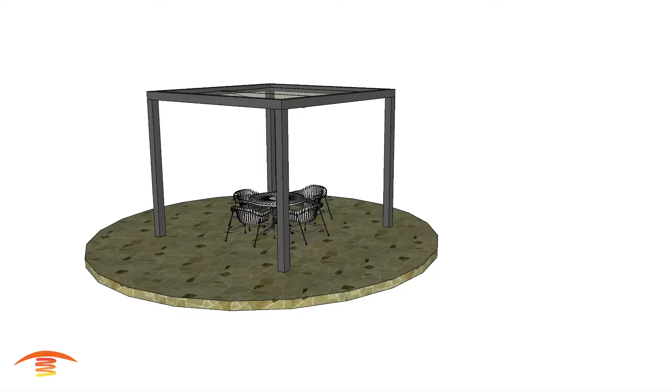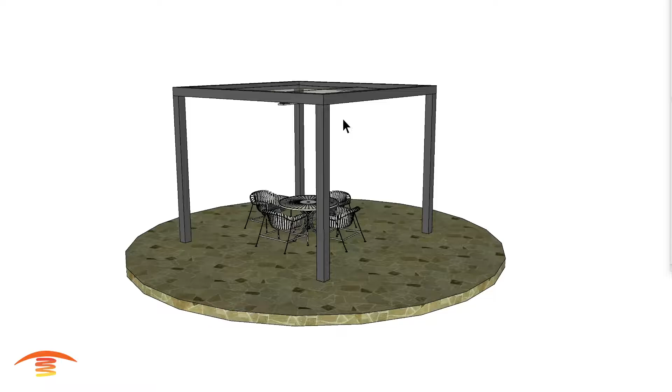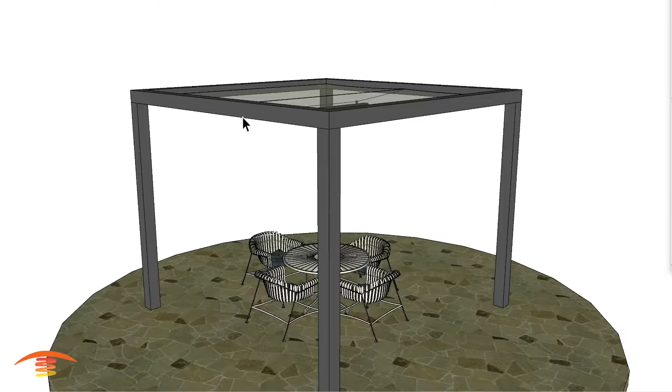Now let's get heating. All right, so we have a listener here that was inquiring about the best possible model for an application like this. This is called a Lynx Pergola, I believe. And if I understand it correctly, it's basically a frame with a canopy top on top here for shading. And I just have this made out of 6x6 framing. I think it's steel framing, so it's all 6x6 steel framing around the edges here.

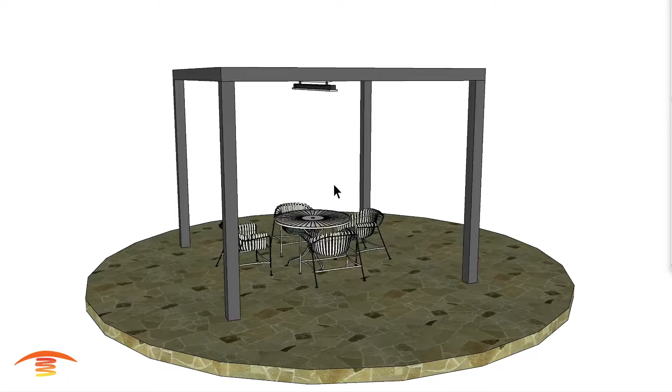Question was really, should I use a 3000 watt unit so I can use the INF, or should I use a 4000 watt unit without the INF? That's the main question here. This particular listener lives up in Northern California. I believe in Northern California I would want something a little bit warmer than a 3000 watt unit, but it really depends on the application height itself. So let's just go ahead and look at the overall dimensions I put on here, 9 feet by 12 by 12.

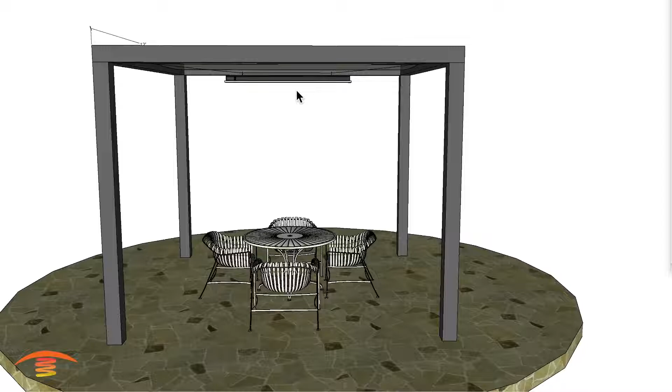So at this elevation, 9-foot elevation, I would probably recommend a 4000 watt unit. I wouldn't go to a 3000 watt unit unless the bottom edge of the heater will be between 7 foot off the ground to 6.5 foot off the ground. That would be my recommendation for a 3000 watt unit. So if your pergola is going to be a little bit lower, that would be a 3000 watt unit.

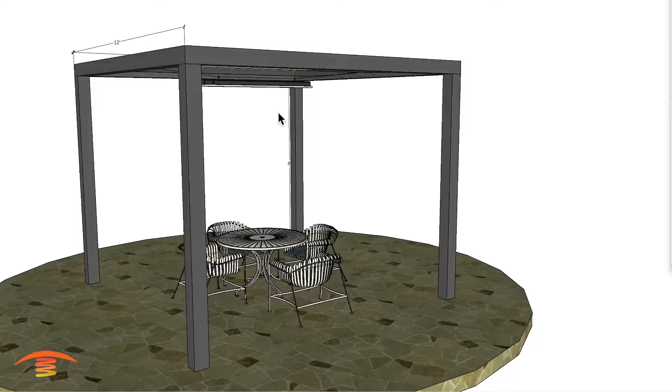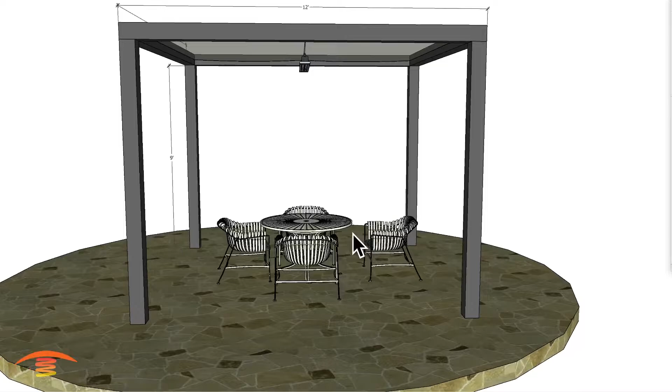You could use that. Now, personally, if I was in Northern California, I would probably want a 4000 watt unit no matter what, because it just puts out more heat, and you're not going to use this heater when it's kind of warm. If you really wanted to, you could just basically move away from the heater. So if you're the hot person of the four seating that I have here, just move your chair out a little bit further and you're not going to be in the ray as much.

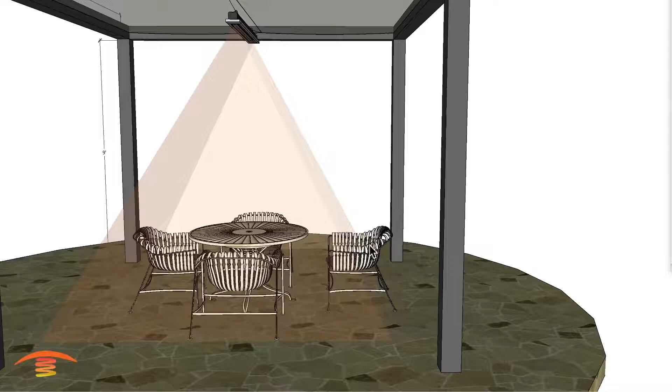So just speaking of that, here's your ray, and you can see here everyone else is covered fairly well. But you could just move your chair out and you're no longer in the ideal amount of ray. The ray doesn't bend and stretch. It does physically penetrate the chair, but you're not going to be in the hottest or warmest portion of it. It's not really that hot, I wouldn't think.

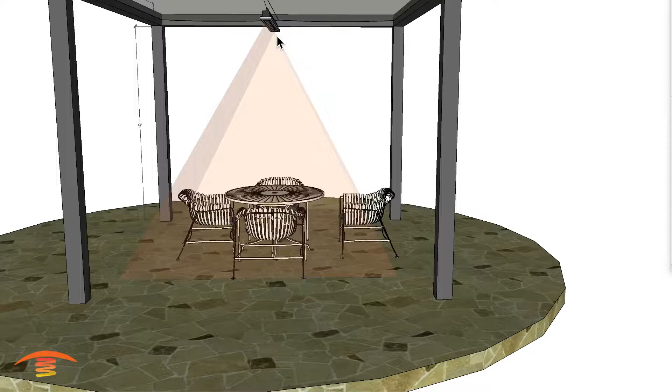Even at 9 foot off the ground, I'd probably want something more in the, personally, 34,000 BTUs or 25,000 BTUs. This is more in the nature of, I think, 12,000 BTUs, something of that nature. In any case, some other things that you want to be aware of.

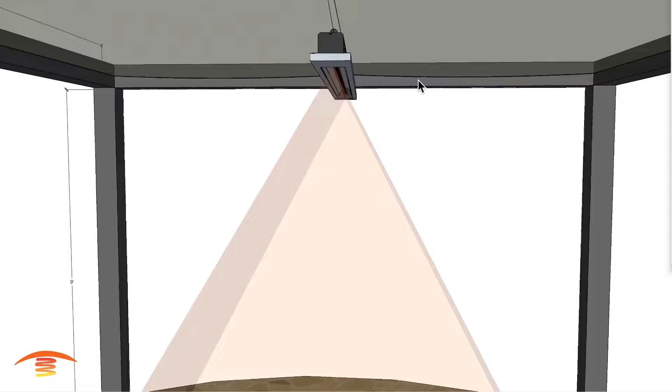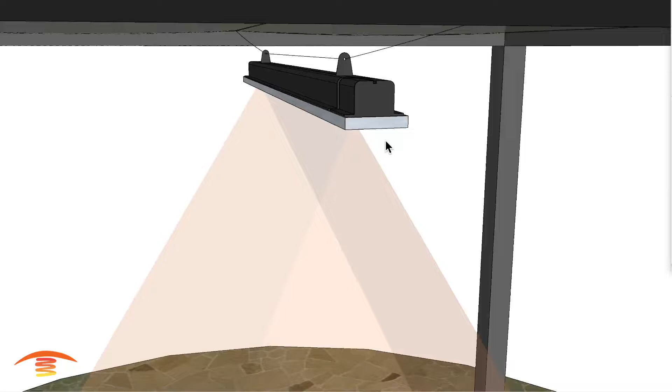So this is going to be some kind of fabric. I'd imagine that there is some sort of draping. So I just put a 3/4 inch drape here and a 3/4 inch drape there, stretched from one edge to the other. And I took a steel cable and attached it to the lower mounting bracket that comes with the unit. You're gonna have to put some kind of fix on that steel cable so that it doesn't slide back and forth. Same over here. There is a junction box located on this side of the heater, so you're gonna run your power cable from this point where it attaches down here and attach it inside of here.

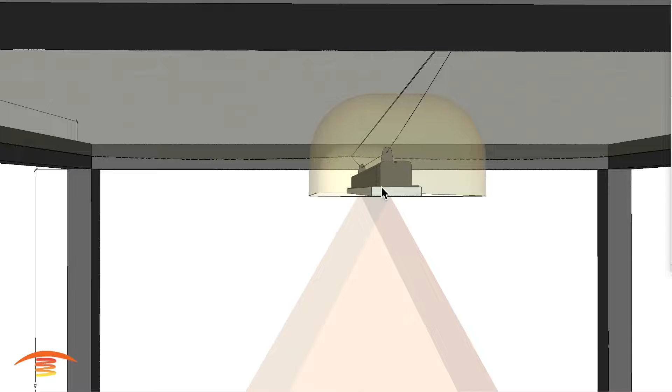A couple other things to think about is the clearances above the heater. So there is a 6-inch clearance around the top of the heater here. So that's why I have this at the elevation it's at, not knowing what this drape truly is. But you want to make sure that you have 6 inches of clearance from here to the top of the unit itself. So bear that in mind. And then of course the clearance below the heater should not be an issue. And let's see if there's anything else I wanted to mention.

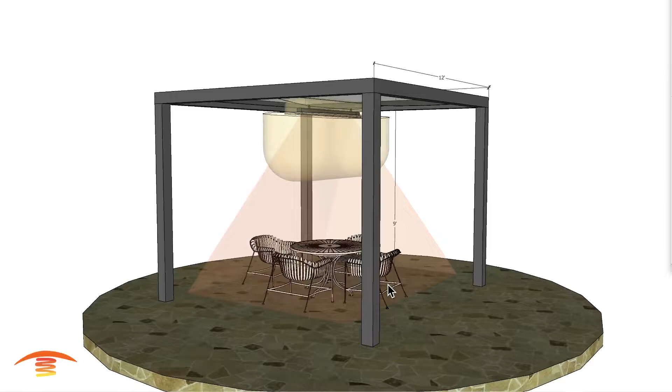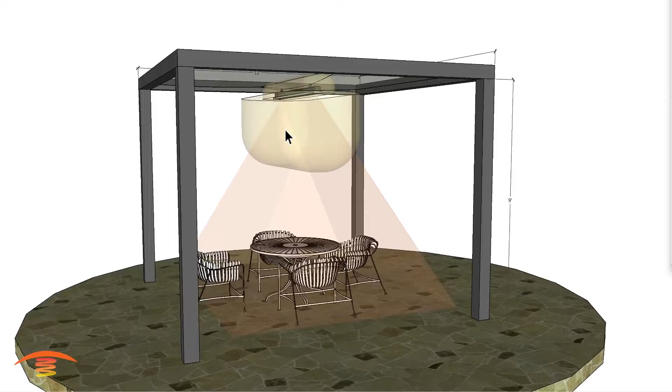So again, just the idea of putting a 3000 watt unit. I am not happy with the 3000 watt unit unless it was, like I said, 6.5 feet off the ground, then you could do that. But if it's something that you want to build a little bit taller, I would definitely go with a 4000 watt unit. And I don't see why you would ever really want to control that too much at this elevation. So all right, well, I hope this has helped.

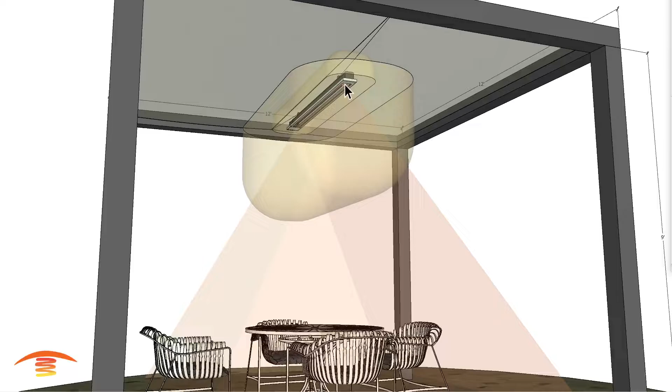I want to say one more thing. Let's just say that you are not happy with the 4000 watt unit. You can always downgrade to a 3000 watt element inside here. So that gives you a little bit of flexibility, and then go to an INF control if that's really what you think might work better for you. And if you take my advice here and it doesn't work for you, that's something that you could change down the road.